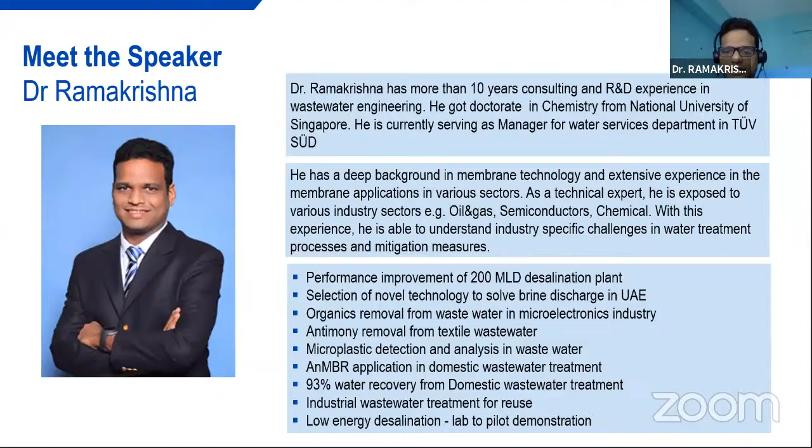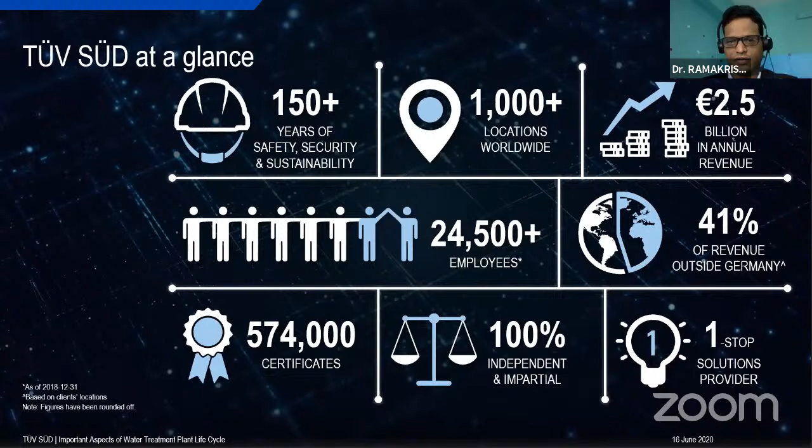Thanks, Dennis, for the introduction, and thanks, Datuk, for the kind words. So myself, Ramakrishna, I'm working in TUV SUD, in charge of water services. We provide consultancy services for all aspects of the water lifecycle, as Datuk mentioned, starting from feasibility study until refurbishment. Most of you might know TUV SUD as a service provider for certification, auditing, and inspection services. We also provide consultancy services in industrial sectors, especially energy services, conventional power, renewable energy, and environmental sectors. We have offices in most countries and more than 24,500 employees, with different services across all aspects of consultancy.

As part of our sustainable service portfolio, we provide consultancy services in water, energy, renewable energy, and environmental sectors. As you can see here, we provide services starting from due diligence, detailed project management or owner's engineers, membrane services, plant auditing, and water footprint and efficiency certification. So we provide consultancy services from start to end of the water lifecycle.

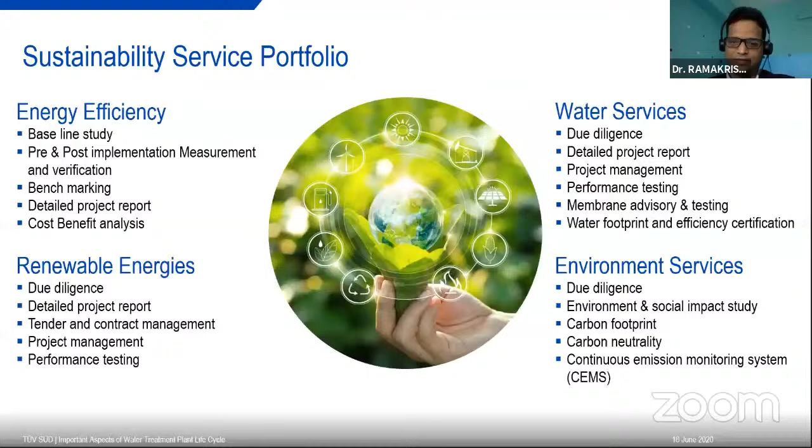Before going into the topic, I want to introduce typical water treatment processes gaining popularity. One is desalination, which purifies water from the sea. As you can see in the picture on the left, we take water from the sea and pre-treat it to get rid of salts and particles, then treat it with typical RO systems. Currently people employ RO systems, but previously it used to be thermal systems, either distillation or thermal technologies. Once the water is purified, it's post-treated because the water is so pure it can't have any minerals in it, so they need to remineralize it and kill all bacteria using UV disinfectant or other chemicals. Finally, it's supplied to the client or community.

Another process is wastewater treatment, where we take municipal or industrial wastewater and get rid of particles and debris using different screens. In the primary clarifier, we try to remove all the heavy suspended solids so they can settle. Then we send it to the next stage of purification, where organics are reduced using biological treatments. After that, it passes to the next stage if you want to remove nutrients like nitrogen or phosphorus. Finally, disinfection and remineralization occur, and it can either be discharged or used for recycling.

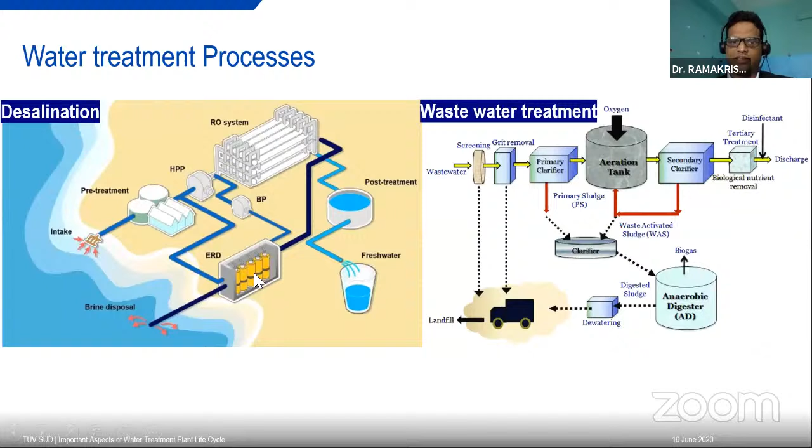So what are the typical life cycle stages involved in wastewater? You can see that any plant, any construction project, whether it is a power plant or water plant or any other big project, involves typically these stages: it starts with feasibility, then planning, procurement and construction, then commissioning and testing.

Once the plant is operated, there are various other services that we can provide, or we need a third-party consultant to look after the plant whenever there is a problem. And once the plant has achieved its life cycle, running for so many years, there may be a need for refurbishment.

So actually, in each section there are multiple aspects where we need to engage a third-party consultant. These are the different phases where a developer or owner of the plant will engage a third-party consultant in order to safeguard the stakeholders' interest.

Today, in today's seminar, I'm not going to touch on each and every aspect, for a few reasons. First, the time is not sufficient to cover each and every aspect of the life cycle. Second, some aspects like procurement, project management, testing and commissioning are pretty much standard in most construction projects, whether power plants, wastewater recycling, or desalination.

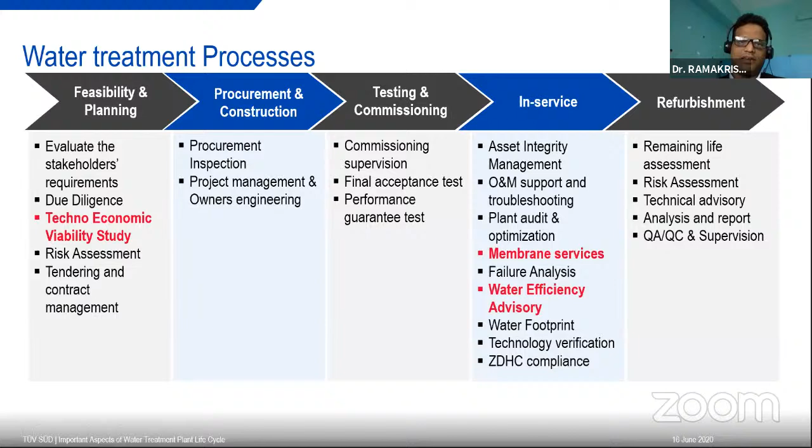So again, in any plant, why do we do a feasibility study? Actually, the feasibility study can be called by different terms. Some people call it technical due diligence, environmental impact study, or social impact studies. There are many ways people do it, but I call it a feasibility study.

So why should we do a feasibility study for any project? Because there are some questions we need to find answers to, asked by different people - the government, the public, the investors, the developer, the operator. We need to establish common ground so that everybody understands the purpose of the project.

And what are the benefits, advantages and disadvantages - all these things can already be answered in the initial stages of the project, in the feasibility study. For example, how can I secure access to the feed water, or what happens after discharge of wastewater - where should I discharge after treating the water? Or is this technology good, or should I apply a different technology?

Or because of my plant or construction, is there any impact on the environment, impact on the society, or impact on the ecology or the public, even the economic impact or economic benefits of this?

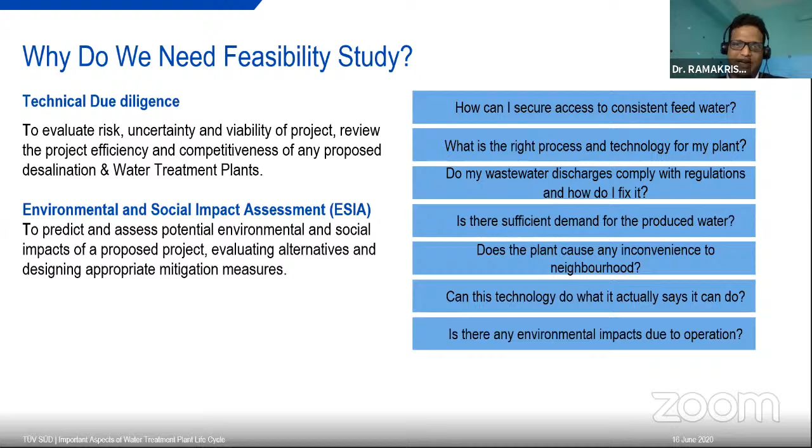This is one of the desalination plants in North Africa. As you can see in the picture, the desalination plant is very near to the sea. And this desalination plant has a lot of problems. After 2 years of operation, they experienced a lot of problems.

Then we go and try to understand what's the problem. Then we realize that in this particular region, there are heavy rains. In the winter, the rains are almost every week. Because of these heavy rains, a lot of mud and particles are being discharged into the sea, near the intake of the desalination plant.

So you can see how heavily the rain can happen, and all this water can be discharged into the sea. As you can see in the middle picture, a lot of plant debris, everything will be taken into the sea, which is exactly the point of intake. So if you take a lot of water from here, and the system, the design, the pretreatment, and also all the technology are not designed to accept these things...

The environmental impact study or feasibility study should consider all the environmental factors as well - how long the rain will be there, what is the change in temperature - and they have to consider the environment for 1 year or more in some cases to account for all these variations. Then you have to design the plant, select the suitable technology, and operate it accordingly. You also need to optimize operations so you can avoid this environmental impact.

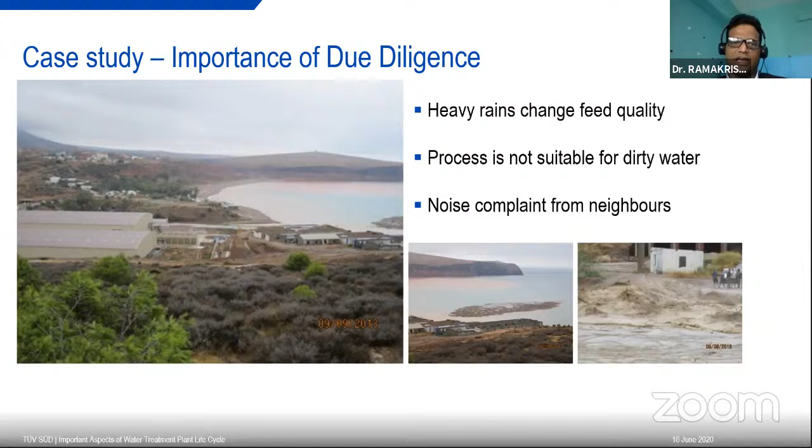So what's happening is they're taking around 50,000 ppm of seawater and discharging around 69... ideally they're supposed to discharge 100,000 ppm, double the concentration of salt. So typically what happens in a desalination plant is you take the seawater, concentrate it—meaning you double the salt concentration—and discharge it into the sea.

Again, you need to take the same water from the same sea. So what happens is eventually the salinity of the seawater keeps increasing. When the seawater salinity keeps increasing, the actual process and technology you designed cannot handle the high salinity. So you have to change the whole system, or you need additional treatment systems after every few years, because the seawater salinity keeps increasing and it will impact after every certain years—maybe every 2 years or every 5 years. You need to look into your process and change the whole thing.

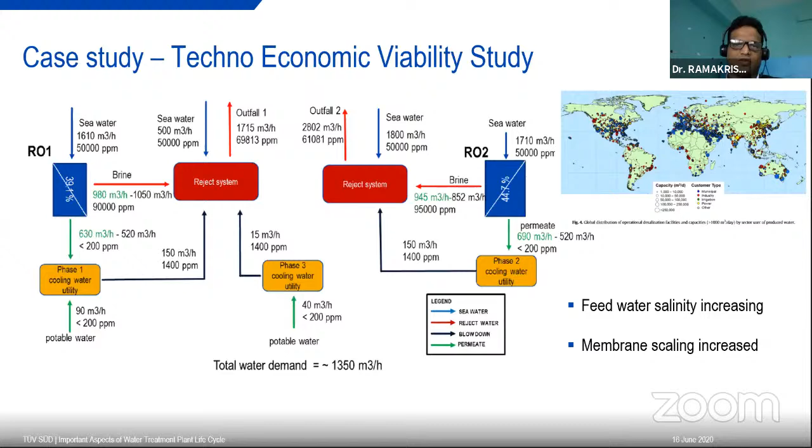Okay, moving on to the next aspect: membrane services, membrane autopsy, which is a very simple thing in the whole life cycle but very effective—an effective way to increase operational performance and reduce life cycle cost. As you can hear from different people, use of the membrane becomes inevitable. Everybody uses membranes, one part or the other. So once you start using the membrane, you'll have problems with membrane filtration.

These are some of the problems you encounter: you need to replace the membrane more often, or permeate quality is deteriorating, or you need to clean so often to keep it running, or the downtime is very high. These are typical problems you can hear from either a desalination plant or wastewater treatment plant. Any water treatment plant that uses membranes will have these problems one time or another.

So before going further into the membrane, I want to ask another poll question to all listeners: what is your opinion? Is there any way to avoid membrane fouling, or the problems that come with membrane fouling? Once you start filtrating, the membrane gets fouled. So how to avoid the membrane fouling, how to avoid this issue? Either chemical dosing, frequent cleaning, or frequent backwash—there may be many other options, but typically these three are the ones people use. Now we are going to discuss in more detail about membrane fouling and how to avoid it in coming slides. But first I want your opinion on how to avoid membrane fouling.

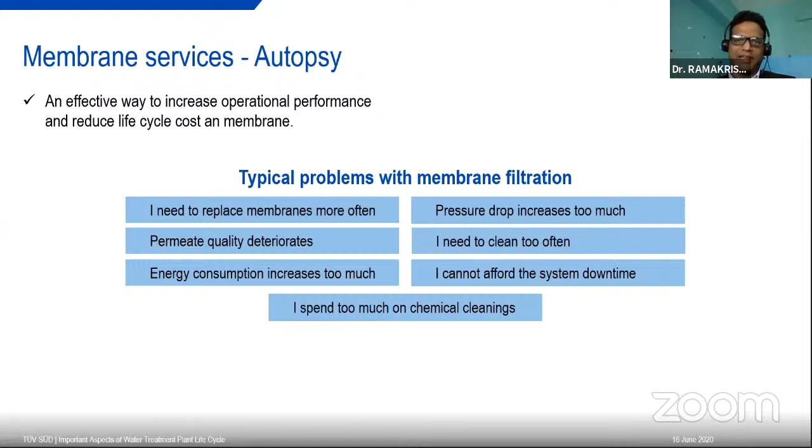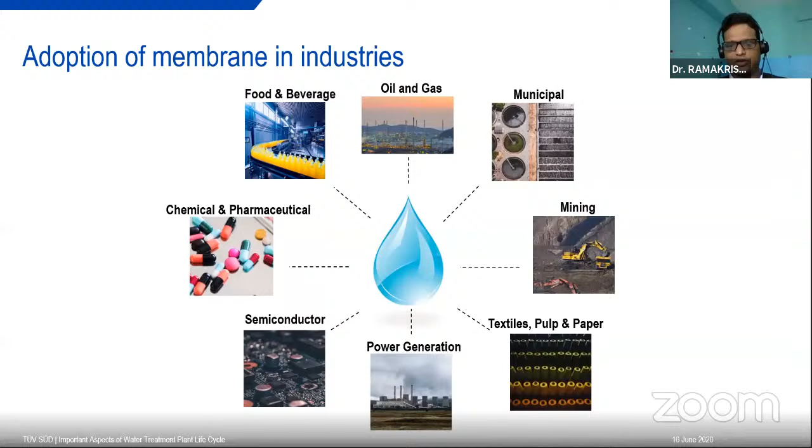So as you can see, adoption of the membranes is not only in desalination plants or wastewater treatment plants. Any industry that requires water for its processing, they are using the membranes or adopting the membranes in their process to get fresh water, to recycle their wastewater, or to meet their discharge regulations. One or the other way, almost all industries are using membranes for their water treatment. So the adoption of membranes has become very popular.

So what are the different types of membranes people are typically using? As you can see, the water contains different pollutants, starting from particles, clay, bacteria, salts, even ions - of course, salts are composed of ions. So not a single membrane can filter everything, that's too much for a single membrane. So people will deploy different membranes for different applications.

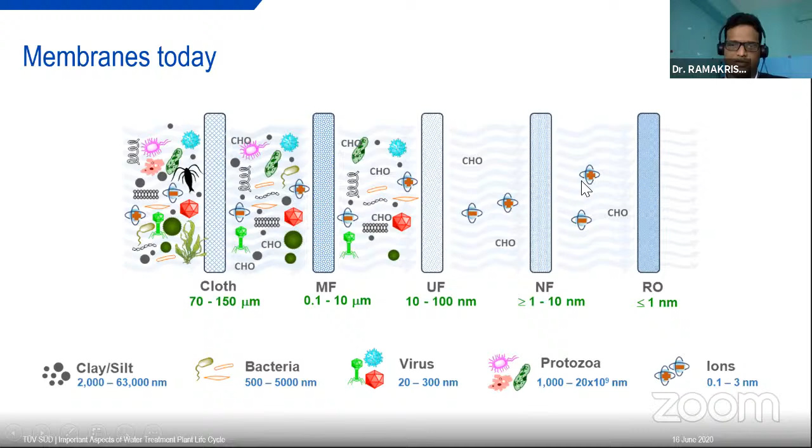As you can see, each membrane can remove certain kinds of pollutants. So MF can remove only particles and other things greater than 0.1 micron. UF can remove some particles, bacteria and other viruses. NF and RO can remove most ions and very small particles. So people use different membranes for different purposes.

So once they start using the membranes, as you can see in the right hand picture, you are pushing the water against the membrane surface. So most of the pollutants will accumulate on the surface of the membrane, forming a cake layer or a thin layer of these pollutants. If it is only ions, we call it scaling. If it is organics, we call it fouling. If it is only particles, we call it colloidal fouling. In any case, all these things are inevitable, as I mentioned earlier, and everybody will face this problem of membrane fouling and scaling.

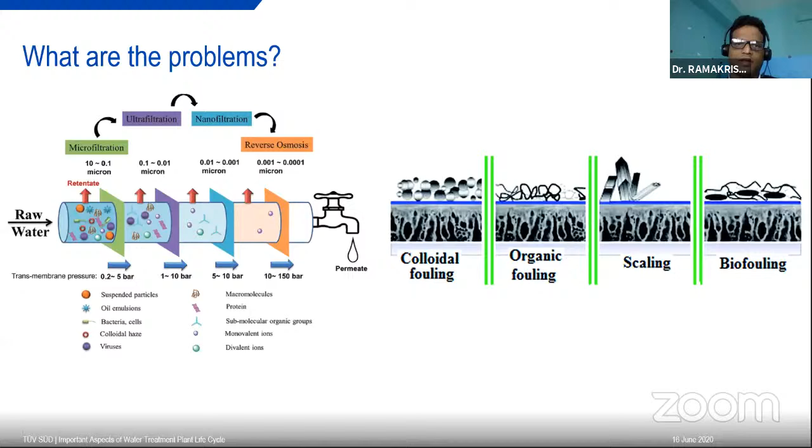So what happens if the membrane gets fouled? Yeah, I buy the membrane, I start operating it, and then my membrane gets fouled. So I still keep operating using these fouled membranes. So definitely your production will reduce, your energy consumption will increase because it is blocking your pores. You have to push the water with high pressure. So you have to replace your membranes, so your replacement frequency will increase.

So all of these things will result in low yield. You're producing less water than designed. And you have to incur a lot of cost, either in cleaning or replacing membranes, or paying penalties for not producing sufficient water. And again, if the operator and the developer, the off-taker - if they are not in agreement, sometimes you may land into legal risk as well.

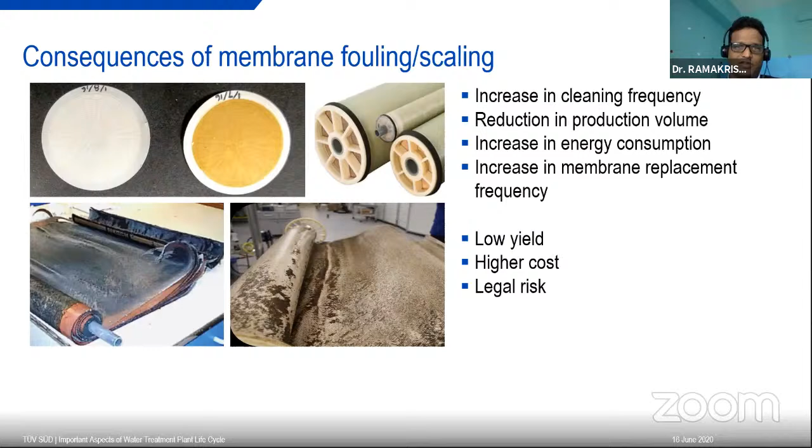So as I mentioned earlier, in the life cycle of the whole water treatment plant, membrane autopsy is not at all a big issue, but it will land into a big problem. Membrane fouling is a big issue. But if you can solve this issue, or manage it very nicely, it can save a lot of cost.

If you want to find out what is causing the membrane fouling, it can be anything. It can be feed water characteristics - the composition might change because of rains or sudden changes in temperature. Or it's the membrane characteristics, because the membrane you're using and the feed water are not a good match, or it's not a suitable membrane. Sometimes the issue is with the chemistry, and operational conditions. Most of the time, operating parameters are the reason for membrane fouling, because there is something wrong with your feed water and you are going to foul it.

You should use operational techniques or tricks to avoid this fouling. But most of the time, operators just follow the SOPs and maintain the same conditions even when there are changes in the feed water or environmental conditions. So eventually it will lead to membrane fouling.

If you want to avoid membrane fouling, you should find out, of all these factors, which is the culprit. Once you find the culprit, you try to solve it. So how do you find the culprit, or the reason for the fouling? The answer is membrane autopsy.

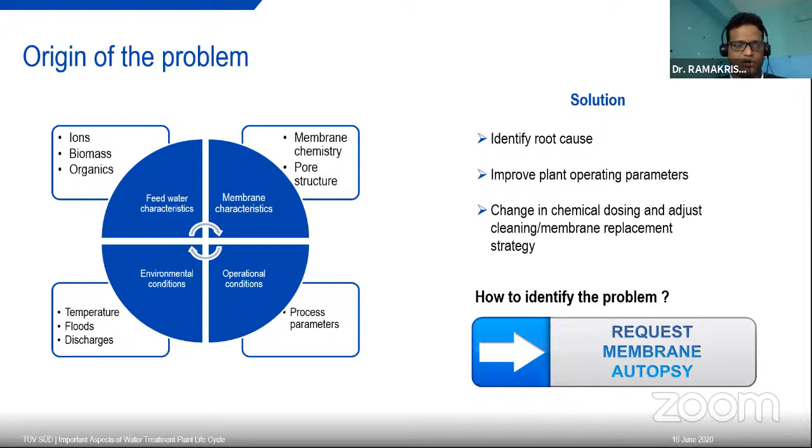I just want to touch upon membrane autopsy and what exactly the information is that you can learn from it, so that it will help you understand or improve plant operation.

Typically we get fouled membranes from the plants. We do exterior inspection, interior inspection, and cut the membrane pieces. We also collect the foulant or scaling from the membrane surface, and we do extensive analytical analysis.

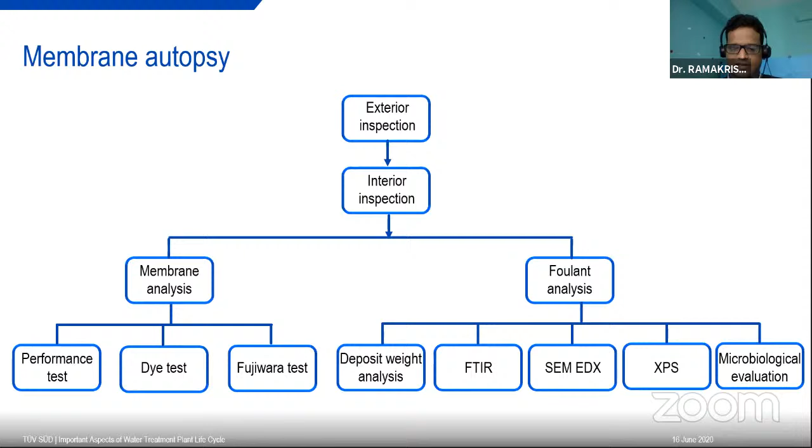We have ISO certified labs. We take all these membranes and the foulant to the labs, and analyze each and every aspect of the physical and chemical parameters of the membranes and foulants. From those analyses, we try to correlate and establish the reason for the fouling.

I just want to show how a typical membrane autopsy takes place. Once the membrane comes, it should be preserved properly and sent to the labs. Once we receive it, we open it up and look into the exterior parts. Basically, we look for debris, we look for damage, and check if everything is in its original condition or if there's any change.

Based on our observations, we try to correlate them with possible causes and give recommendations. For example, if there are cracks, they can only happen during transportation, or during loading or unloading of the membrane - so the operator should be very careful. If debris is found on the outside of the membrane, then we can say the pre-treatment is not working, and that's how the pre-treatment allowed certain particles and debris into the membrane.

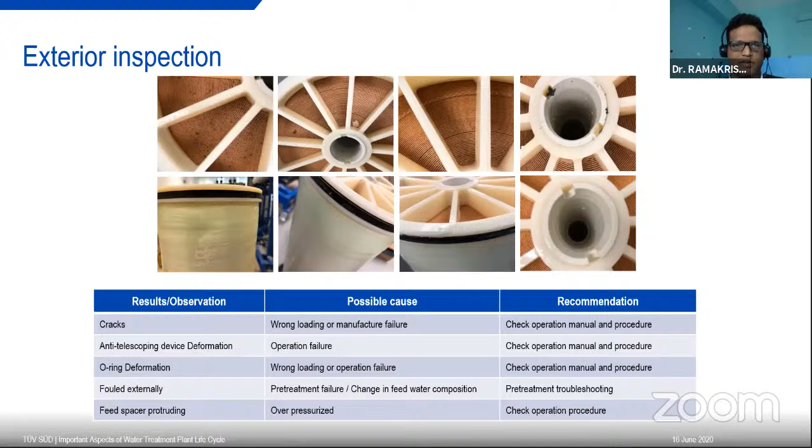Once the exterior inspection is done, we do the interior inspection. We cut the membrane, open it up, and look into each and every leaf of the membrane, and also the spacers. We collect all the information, look at it qualitatively, take pictures, and find all the abnormalities present in the membrane and spacer. Again, we try to correlate what could be the reason, the cause, and the potential recommendation for how to avoid this fouling or scaling.

As you can see, if salt is observed, or if there is organic fouling, then we can say you need to add antiscalants, or use biocides to avoid biological growth in the membranes.

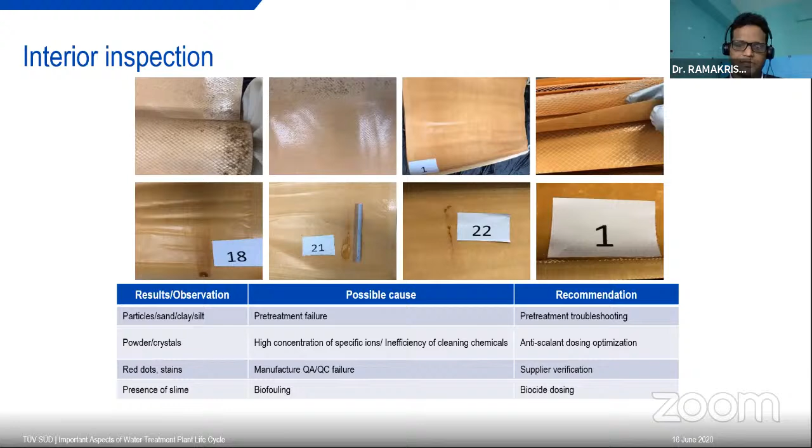And then we can do some analytical tests to look at the membrane integrity. We take membrane samples and do dye test and Fujiwara test. These tests typically tell us whether the membrane has pores, is damaged, or is oxidized because of the chemicals people are using during the operation.

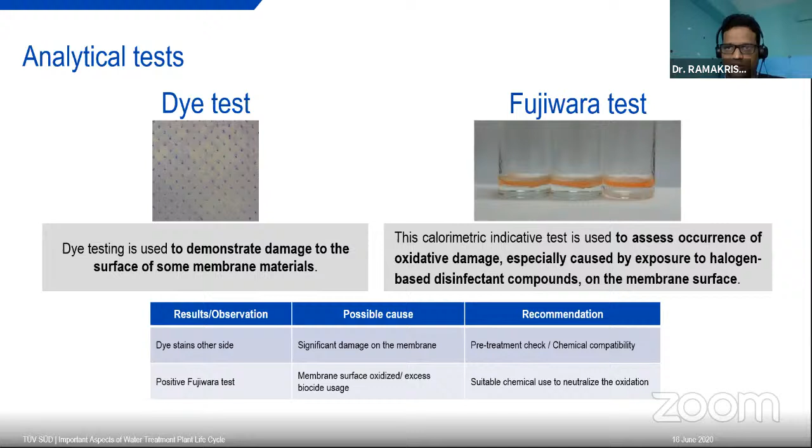And then we take the foulant and send it for different analytical tests. Again, don't worry if you don't understand all the analytical techniques. I'm from a chemistry background, so I like talking about these things. But as an operator or developer, you don't need to understand how the techniques are done, just the value of what information you get from the test and how it helps a smooth plant operation.

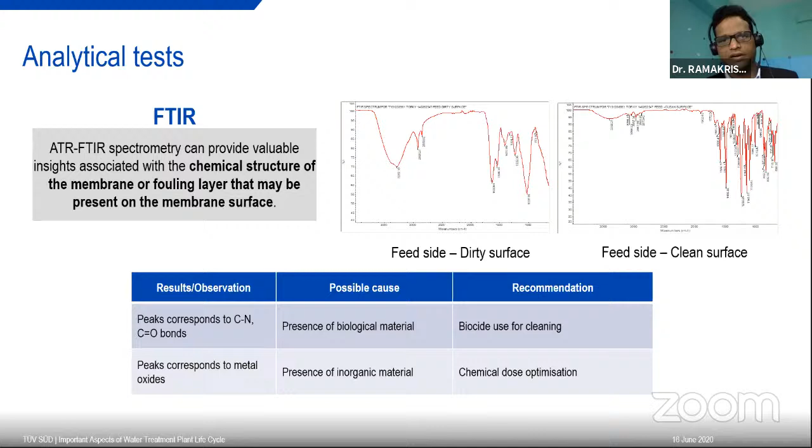FTIR generally gives the peaks or functional groups present in the foulant. Those functional groups can be correlated to what kind of foulant it is, whether it's biological in origin, or metal oxides, or salts. That helps us recommend which chemical to use and what cleaning frequency should be done.

We also do SEM-EDX. SEM-EDX gives you a visual observation of what the foulant looks like down to the nanometer level. We can find out what kind of microbe or bacteria it is, what kind of scaling it is, whether it's organic or bacterial fouling. EDS gives the elemental or chemical composition of the foulant, helping us determine exactly which salt it is - calcium carbonate, calcium chloride, or iron oxide, and whether that iron is coming from the feed water. This information helps us recommend suitable action.

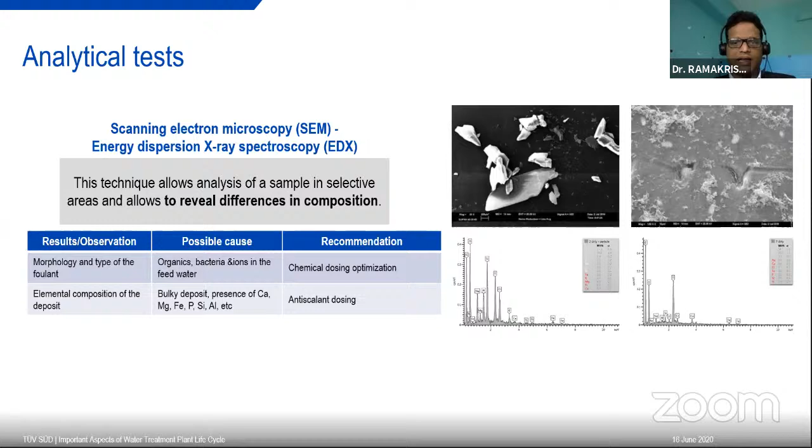XPS, X-ray Photoelectron Spectroscopy, is an advanced analytical technique that goes very deep into the chemical structure. You can even find the bonds between elements, so you can accurately establish the chemical formula and compound present on the membrane surface. Don't worry about the formulas themselves - the point is that XPS lets you find out what compounds and functional groups are present, and from there identify the cause of fouling and scaling.

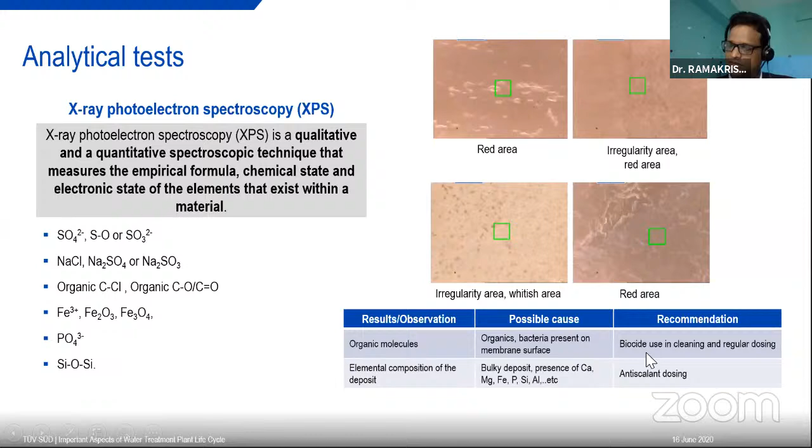Another simple but very informative test is weight loss. We collect the foulant and dry it to find out the moisture loss. After the moisture is removed, we burn it at 550 degrees, which burns out all the organics. What's left is either clay, silt, or metal oxides. From this composition, we can find how much is from organics versus inorganics, which helps identify the key culprit.

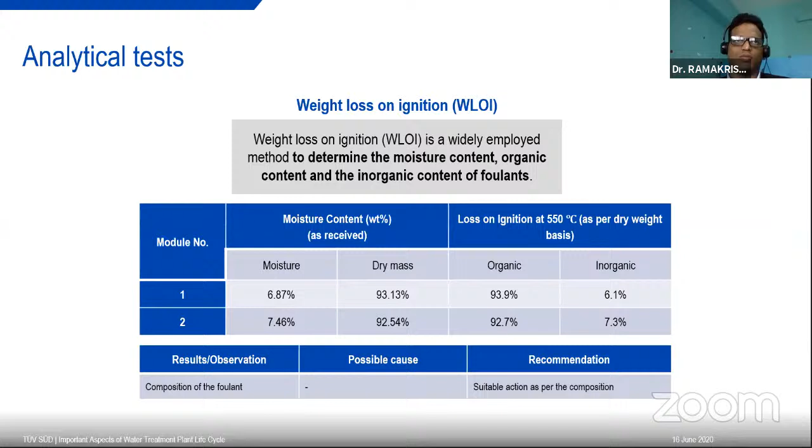Is the fouling happening because of organics, a biological thing, or is it from the inorganics present in the water?

Some other analytical tests are specific to microbiological analysis. Microbiological content will be present at almost every stage of water treatment, but the question is how much. CFU per meter square is the quantity we measure for the presence of microbiological things - whether it's too much or too little. The presence of biological material on the membrane implies organics are there, acting as food for the microbiological growth, which is why they grow there.

That means either we need to use a biocide to kill these bacterial things, immobilize or deactivate them, or we need to focus on treating the organics in the pre-treatment stage. That way you can avoid membrane fouling.

So we do all the analytical tests and collect all the information, then we put it into a report. This report is not just a summary of all the analytical tests, it's basically the analysis of the results, trying to correlate the chemical compound and structure and type of the foulant that you have, and also the recommendation on how you can avoid it, how you can manage it, and how you can add value. We try to add value to the customer through our recommendations, which will improve the plant performance very significantly.

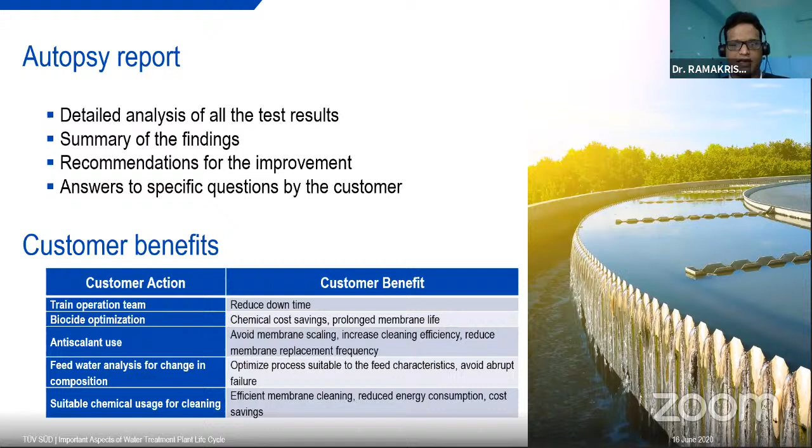You can see some of the things in the table showing the different recommendations we do and how the customer can benefit. Our recommendation could be to use a different chemical or suitable anti-scalants to avoid fouling and scaling, or to do the pre-treatment properly to protect the membranes, because typically a desalination plant or wastewater plant will have thousands of membranes in big plants. So understanding the reason for the fouling and taking proper action can save millions of dollars. That's why membrane autopsy should be a key aspect during plant operation.

I want to give one of the case studies that we did for a desalination plant in the Middle East. It's a very big desalination plant and their plant efficiency had gone down, so they couldn't produce sufficient water. They sent the membrane to us, we opened it and did all kinds of analysis, and found that a lot of the fouling was because of organics. So we asked them to change the chemical cleaning.

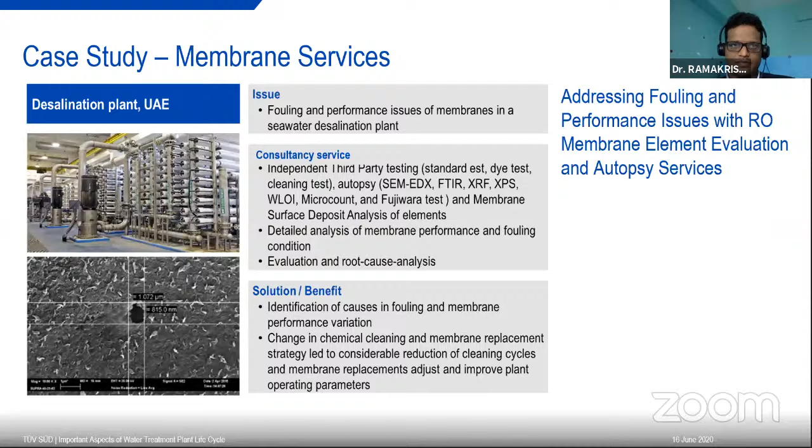Of course, every plant has its own SOP for what chemicals to use and how to clean. The membrane supplier will give a standard SOP for using the chemicals, but based on your feed characteristics and changes in operations, you need to understand exactly what to use and how. So as a third-party independent consultant, we can tailor cleaning cycles and cleaning mechanisms, or the pre-treatment action you need to take to improve your plant operation. Okay, that's about the membrane autopsy.

And the third one is water efficiency. Nowadays these water efficiency studies have become very popular because everybody wants to show that they're using less water, or that they are water positive. It's not a luxury thing anymore. Now it becomes a necessity, because when there is no fresh water available in the vicinity, the only way you can generate fresh water is by recycling your own waste.

Singapore is a typical example where we're trying to get more than 50 or 70% of our water by waste recycling. Because of water scarcity, every country or company is forced to think about water recycling instead of discharging a lot of waste. So now there's no term called waste, the waste becomes a value. Everybody is calling it value recovery now, not wastewater treatment. It's about value recovery, or how to utilize it more efficiently.

So what exactly is this? Basically you need to identify whether you can recycle the water from your discharge, or if there's any other water stream in your whole process or plant that can be recycled. All this depends on a few factors: what is the water quality, what is the water usage you have. Within the plant, you can use recycled water for different purposes like washing, cleaning, or other processes where you don't need very high quality water. Of course, we can even generate drinking water from waste, but that may involve a lot of process and technology.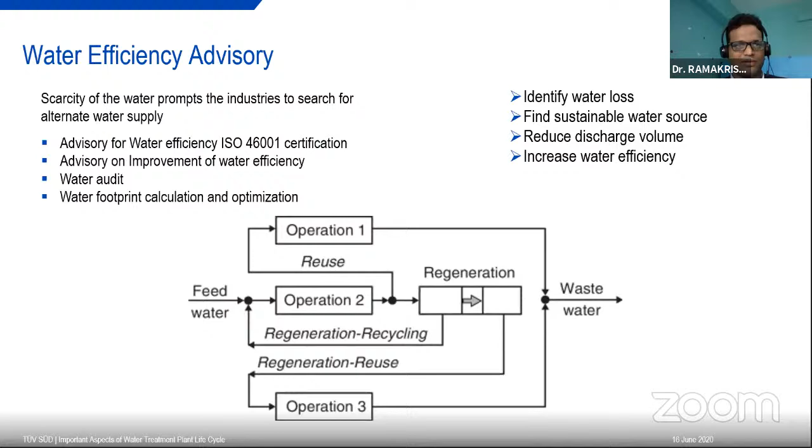I just want to close by giving an example of one of our studies. This cement company uses a lot of water, and they actually claim it as water neutral or water positive, which is good for the environment and good for themselves, so they reduce water intake cost and reduce cost on water discharge. So we went there and looked into the whole process, their water balance and all their water streams, and how they're utilizing the wastewater.

We actually encourage all companies to do this, and we also provide advisory services on how to achieve water efficiency, how you can improve your water recycling, those aspects. So we did this, and then we certify that this is really water positive.

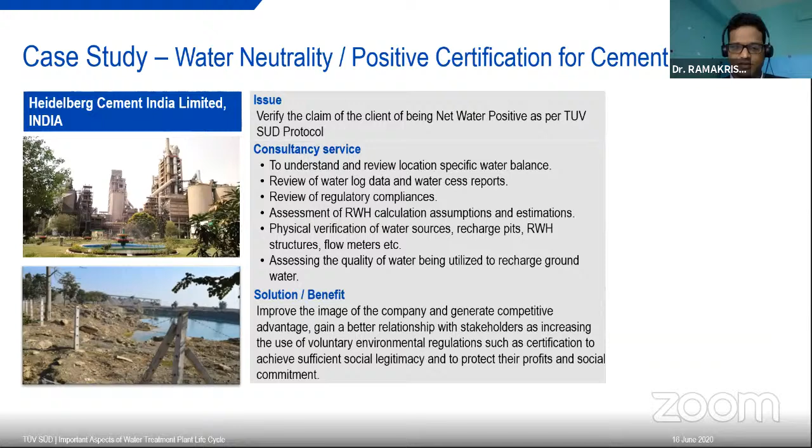So I think that's all from my side. Again, I could not cover all the aspects of the water life cycle because it's too big, and I hope to cover it in another session. But as a tutor, we want to add value in terms of knowledge and understanding of how simple things can also improve your plant efficiency or make plant operation smoother.